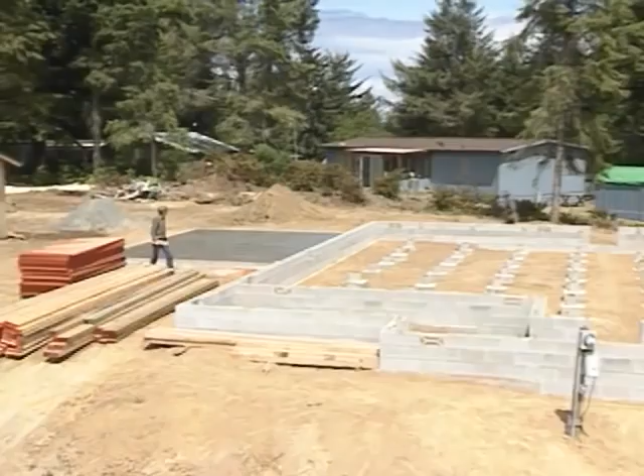You know, it's a good feeling. Come on a job, looks like this. It's clean, it's going to be a safe place to work. Any contractor that leaves a job looking like this has to be proud of their work.

So we can be pretty sure that this foundation for the crawl space is square and level. As carpenters, that's our responsibility to check that. Then we're going to put down our mud sill. If this gets done properly, the entire framing process is going to go a lot easier. So we'll begin by Joe and I checking this building for square.

You pull out 6 foot, I'll pull out 8 foot. We're using a standard 6, 8, and 10 check to make sure the block layers left us with a 90-degree corner. Now if they didn't, we'll have to adjust the sill in or out a bit to compensate. Looks great, Joe. It's right on 10 foot. Let's check the diagonal, see if we're square clear across the building.

This is your best check for the squareness of an entire building. What you're hoping for is that your diagonals are close to the same length. Right on the money. This building's square. Finally, we check the building for parallel. We want close to the same width on each end. 1/8 inch off. That's good.

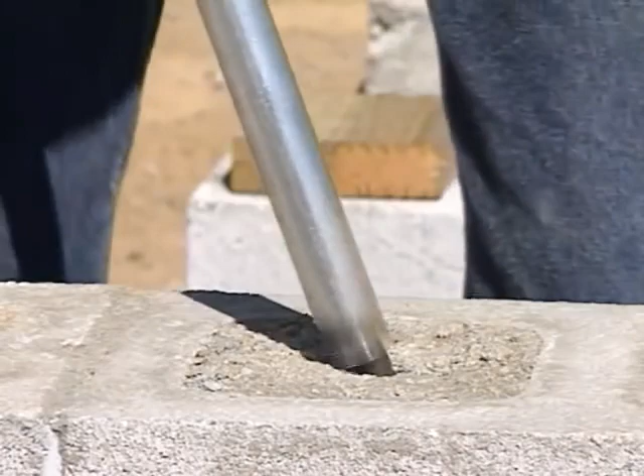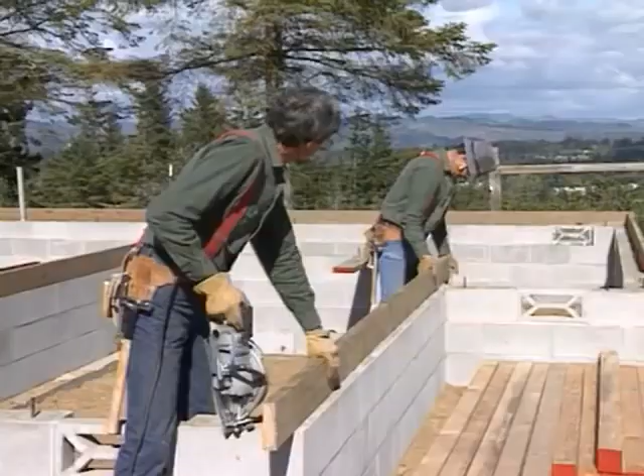Some of these foundation bolts are bent. It's no problem. Take a hunk of 3/4 pipe and straighten them up. Well, it's time to scatter all of our 2x6 sill around the perimeter of the building. It's a treated sill, so it resists dry rot and it really discourages termites. And once all the sills are scattered, we can cut them to length. That's it. Looking good? So, time to cut all our sills.

A good, efficient carpenter doesn't always have to use a measuring tape and a square to get the work done. Let's take a look how that goes. First of all, we sight down this concrete foundation to get our board marked for length. We mark it with a saw cut. We pull the board out a bit. The next step is important. How do we cut square without a square? Well, simple. Line the saw table up with the edge of the board and make the cut.

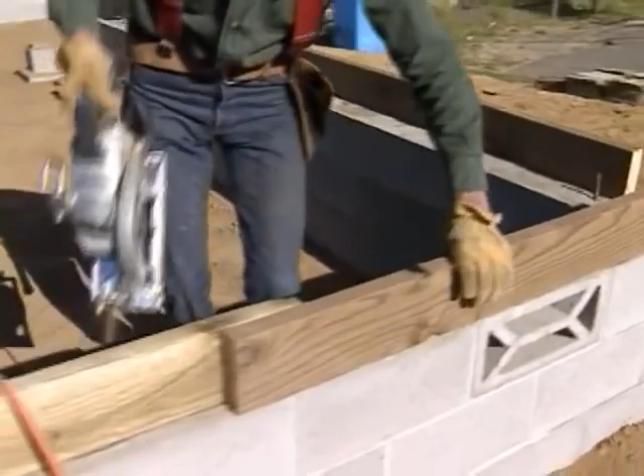Shove this piece of sill back out of the way and take a block of the same material and position it flush with the outside of the foundation. Then we can bring up this piece of sill and cut it to length again without using a measuring tape. Safety is part of being a good carpenter. Wear gloves when you're handling this treated wood. And wear safety glasses, earplugs, and keep that saw guard down.

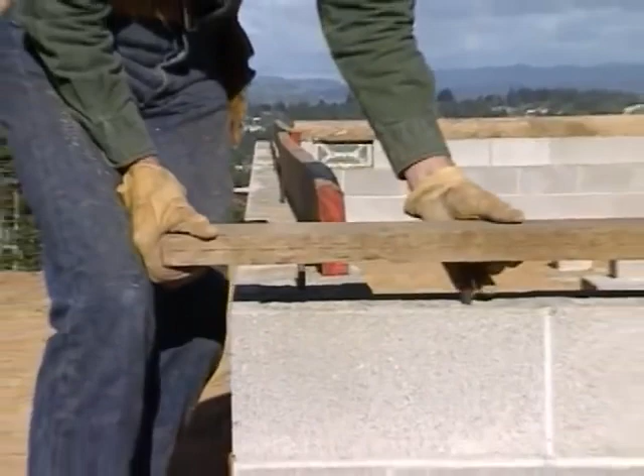The next thing we do is mark the bolt hole locations on all the sills. Just align the board flush with the blocks. Okay, looking good. I'll mark the first one here. And then we just tap down with our hammer directly over each bolt. That leaves a mark that we can use for drilling our holes. We use a heavy-duty drill motor and a good sharp auger bit to drill our holes. We drill at least an 1/8 inch larger than the diameter of our bolts.

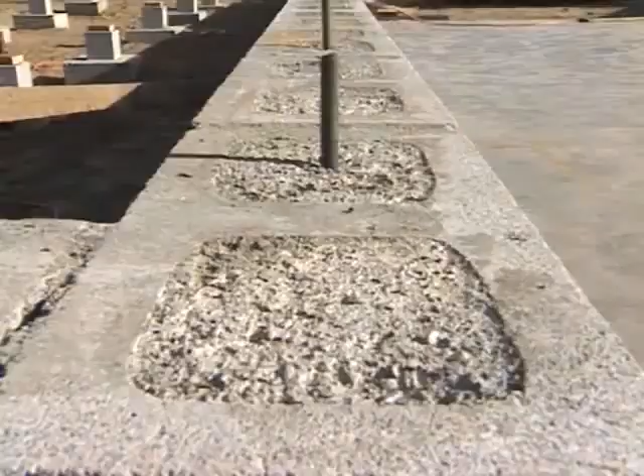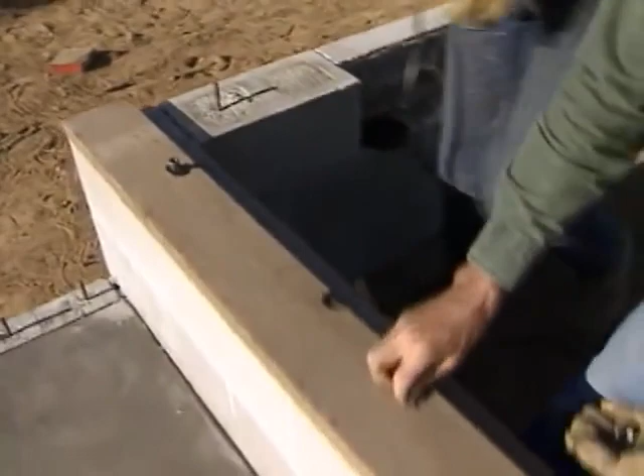To help keep out the cold, we put down a fiberglass sill sealer. You can also buy one that's made out of foam. Check your plans and the local code to see what's used in your area. Now the sills go down. Joe puts washers and nuts on the bolts, and I like to tighten them down with an impact wrench. That's a lot faster than a socket or crescent wrench.

Yesterday, Joe and I finished bolting down all these mud sills. And you remember that we checked our corners for square and our walls for parallel. Well, today we've been going around and making sure that our sills all the way around the building are level. And you know, it really is pretty incredible, but they're close to perfect, about an 1/8 inch variation.

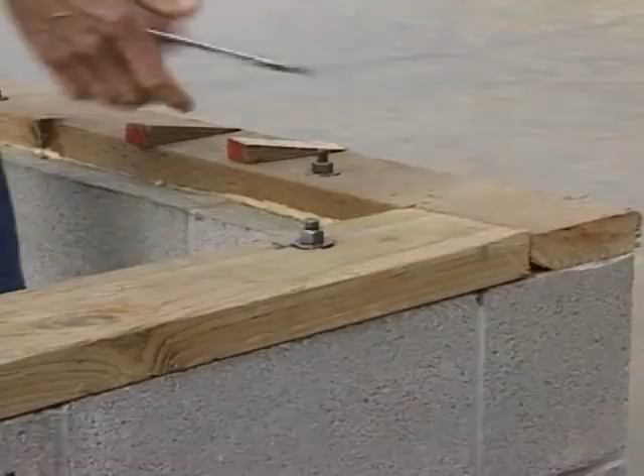But sometimes that's not true. You'll have to adjust these sills a bit. Simply loosen the bolt. Take a couple of treated shims, pick that sill up the desired amount. And this crack here gets filled with the dry pack. It's a dry concrete mixture.

Now take a look at these bolts. They're within 1 foot of the end. That's the code, not only here at the corner, but also down there at the joint. And then every 6 feet, you need another bolt. Now it's important not to take these bolts for granted. They're what keep your house where you want it to be, on the foundation.

The next thing I need to do is cut out for the girders that'll go in these pockets left here in the blockwork. I first outline the cut using a scrap of the girder material, and then I plunge cut very carefully with the saw. Plunge cuts can be made safely with both hands on the saw. One hand controls the switch, the other hand momentarily lifts the guard.

It always helps to have 2 people working. In this case, Joe's going around marking all the girder pockets, and then I work my way around cutting them out.

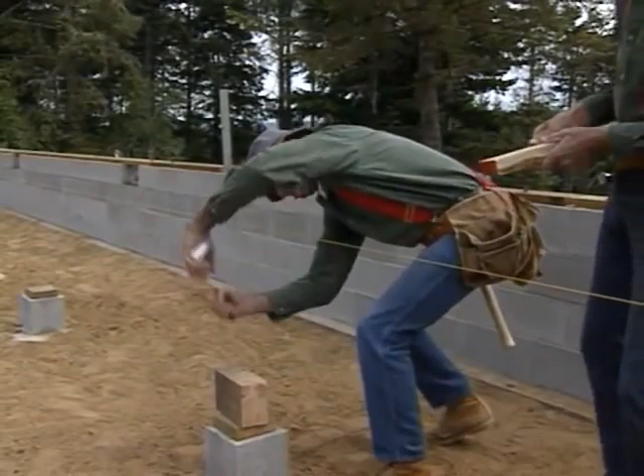Here we're building over a crawl space, so Joe's stretching a dry line tightly across the building from girder pocket to girder pocket. Then he uses a scrap of girder material on top of the pier block, and he measures the length of each post. He marks that length on the pier, and I write it down on a cutting list.

If you're supporting larger joists over a full basement, you'll find more information later on in the tape and, of course, in the book.

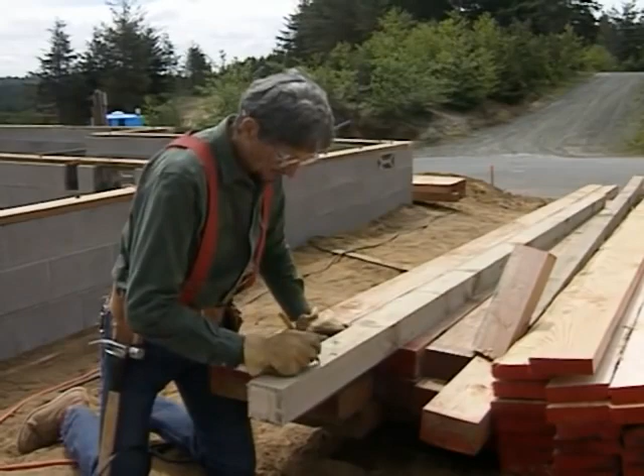With this cutting list, I can cut the treated 4x4s to length. One of the most efficient tools we have for cutting posts is a radial arm saw, but we don't have one on this job. So we'll be showing you several other tools. Here I mark the length on each post, and then I cross it off my cutting list.

Here's another place I don't have to use a square to make a square cut. Just line that front edge of the saw up with a 4x4 and make your cut.

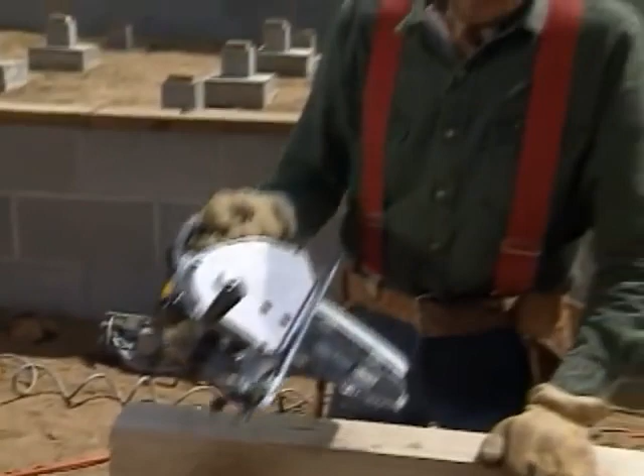There are other saws you can use to cut this 4x material. Here's one. It's a circular saw with a chainsaw attachment. It's got a guard here in the back, but it doesn't have one in the front. So when you're using this saw, set a square on the material, grab it with both hands, and use it in a safe manner.

And here's another saw we use to cut heavier stock. We call it a beam saw.

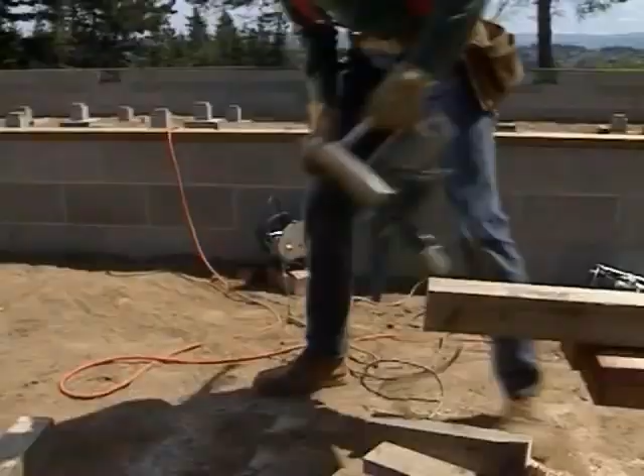And then, if you have a power outage, there's no electricity left in the world, and your electric generator won't work, grab the old handsaw and go for it. And 3 days later, you'll be through this 4x4.

Well, we've got all our posts scattered, and we're ready to nail them on top of our piers. Now this one here is in good shape. The post itself is cut square, and the pier is set in good and level. Now let me tell you, I've been on a lot of jobs where this just wasn't the case.

A lot of times these piers get poured out of level, and what happens is that makes the post out of plumb. Now, to compensate for that, you may have to cut this post out of square a little bit. So when you're finished, the post will set square on that pier and give good solid support to the girder up above.

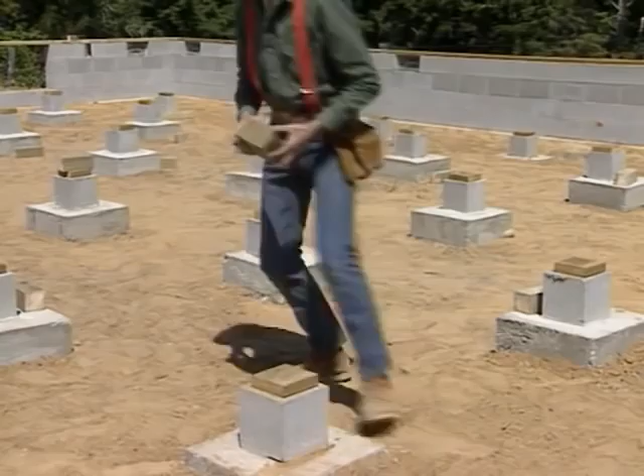Now that we've got all these posts cut, we have to toe nail them to the piers using 8 pennies, 2 in from each side. You could also use 16s instead. And we just center them on the blocks by eye. Again, these posts are treated, but check the plans and the code to see if they're required in your area.

The next thing we do is scatter and nail all the girders in place. Where the girders fit into their pockets, we cut a block of treated wood to bring them up flush with the sill, and then we nail them off.

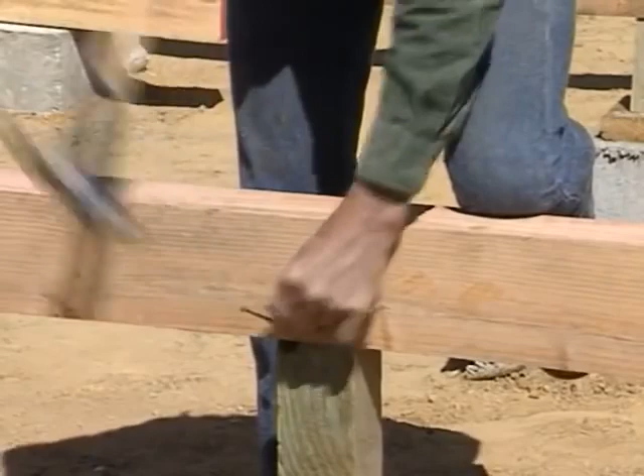Notice that here in the crawl space, these girders are 6 feet on center. Over a full basement, we support larger joists by a girder or a wall in the middle. We nail the girders securely to the post with 16 penny nails. Now, in some areas, the code may require a plywood gusset or even a metal connector at this joint.

Now, I want to show you something that happens out on the job. These piers, they're poured and lined. But let's face it, sometimes they're not done as well. So what happens is, when this post is put in the middle of the pier, you don't have full bearing under this girder. It looks something like this.

So what we do is we nail both ends, and then later on we can put in these posts and line them up like they ought to be. So it has full bearing underneath this girder. Then we can nail it down.

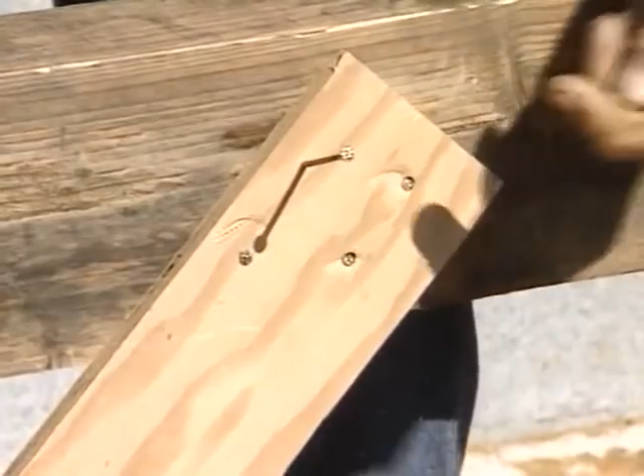Another thing is that when these pier posts are 3 foot or longer, you have to nail a brace on them. That's what the code wants. Well, it's obvious that this post is only about, what, 20 inches long? But this is the way the brace nails on.

Now, beams aren't always perfect. Take a look at this one. It's twisted. We want it to set flat down on that girder post. Let's show you how we do that. When a girder's as twisted as this one is, I just make a cut mid-span right over a post. That way the twist is taken up by 2 pieces rather than 1. That's the way we want it.

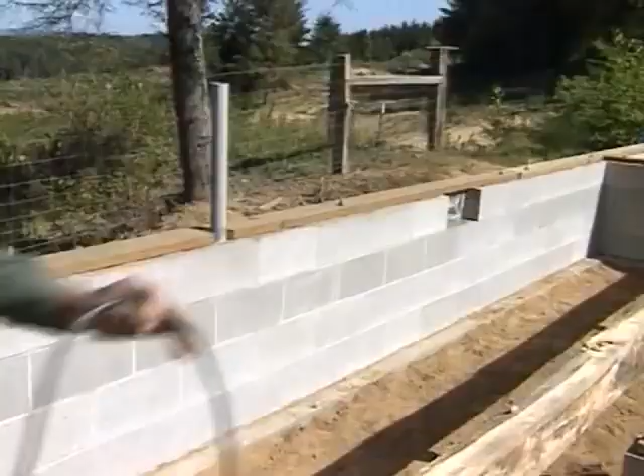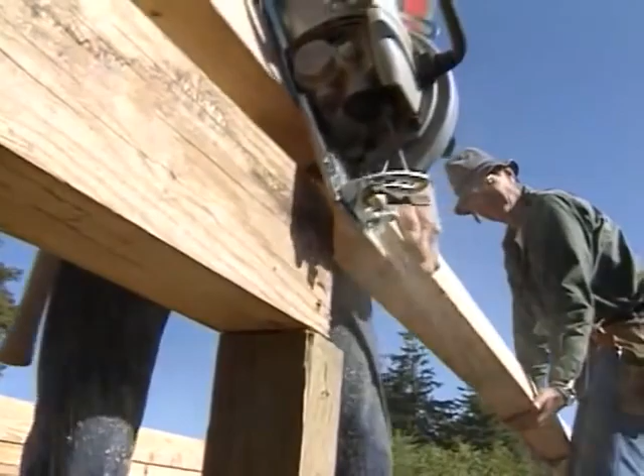Well, we just have a few more middle girders to place. And to do that, we have to cut off some of the ends of the girders we've run in. We wait to cut them to length until after they're all nailed down, so we don't have to use a tape measure. Also, when we nailed them down, we made sure our nails were off to one side so the blade wouldn't hit a nail. You'll note that we're cutting to fit this building. We seldom have to use a tape measure.

Here at the joints, we nail each girder to the post with 2 16s, and then we join the splice with 3 more. Now with the girders nailed in place, Joe's taken a moment to sight across the top and make sure everything's flush.

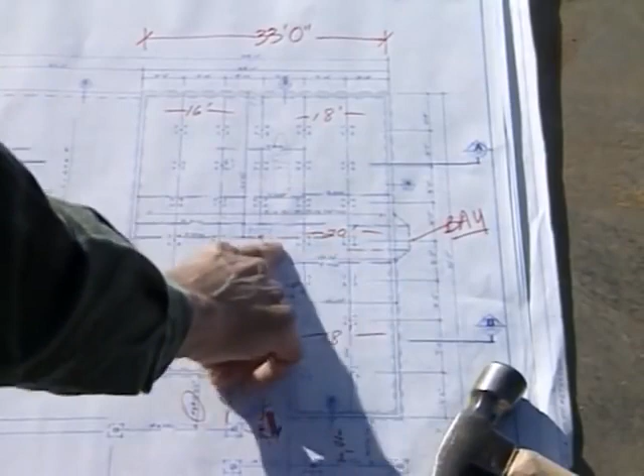So I guess all these joists for this building are 2x6, huh? Right. Except in this front end where we have 4x4s for a deck that's going to be built out here. That'll drop it down 2 inches so we won't have water problems. And then I guess we only take 2 lengths, 16-footers and then 18-footers on over, except here in this area where we've got a little bay window. The cantilever's out 2 foot right there. It'll take 20-footers here. So I guess we can get started.

And right along this side over here, we'll run on a rim joist. Right, just use 16s over there for the rim. 16-footers here we'll use for rim joists. We'll get that nailed on, laid out, and pack joists. Let's do it. Well, moving lumber is one thing a carpenter does a lot of. Make it as easy on yourself as possible. Drop the lumber close to the building and learn to carry it on your shoulder.

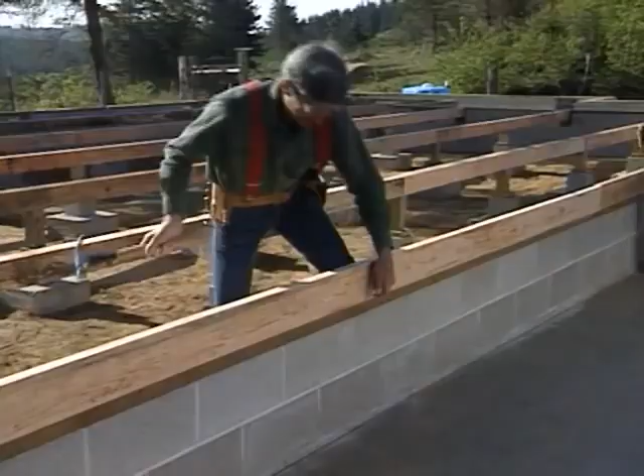This is a rim joist. It nails flush with the sill. I nail it tight at one end and then toenail it every 16 inches with 16 penny nails. It's important to tie that rim joist to the sill. When you're framing up higher, you may need to work off the plate like I'm doing here. Now keep your mind on what you're doing and work carefully.

The next thing is to lay out the rim every 16 inches on center to mark the joist locations. I use a crayon, we call it a keel, to make a clear mark at 16, 32, 48, and so on. The marks on the side of the line, these show where the joists will nail.

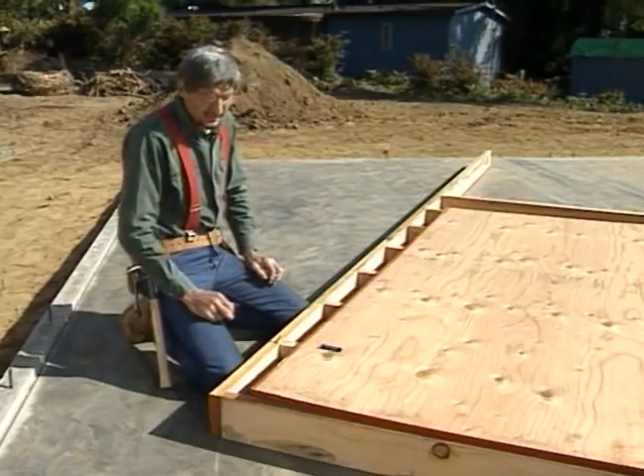Here on the garage slab, we've set up a model floor in order to illustrate a point. This rim joist is laid out just like the one we nailed on. We hooked our tape on the outside, came over 16 inches, made a mark for our first joist, then 32 inches, 48 inches, and so on down the line. Now, what this means is that when we sheet with our plywood sheeting, this first sheet is going to break half on this first joist. But that's just the way it does down there on our last joist. And it has to break like that because we're going to go on with another sheet.

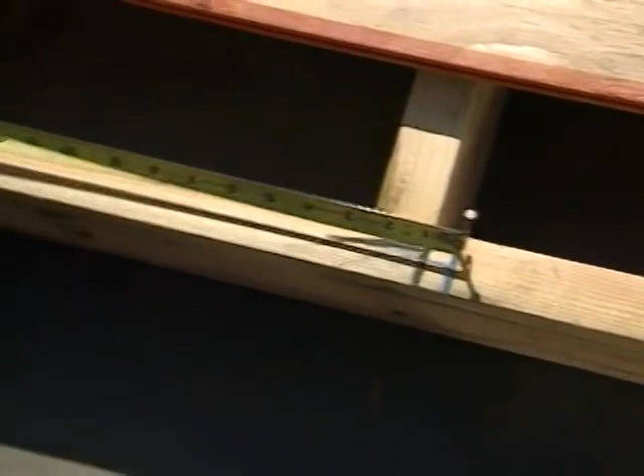Now, traditionally, it's been done a little different. They'd hook their tape on the outside, and they'd come over 15 1/4 inches, make their mark. Then, they'd drive an 8-penny nail in at that point, hook their tape on it, and go 16 inches, 32 inches, 48 inches on down the line. What that means is that this first sheet of plywood will have full bearing on this outside joist. We don't do it that way. It means an extra step, and structurally, it just doesn't make any difference.

With the rim nailed off, time to scatter the joists. Start on one side and lay down a joist every 16 inches. Once you get a few joists down, then you have a safe walkway to carry the rest.

Now we've got the joists scattered on one side, but they're long, so we mark them quickly with a framing square, cutting off the ends for blocks. These go between the joists. It's easier to work here in the middle of the building and cut these joists to length before we scatter all the rest of the joists on the other side.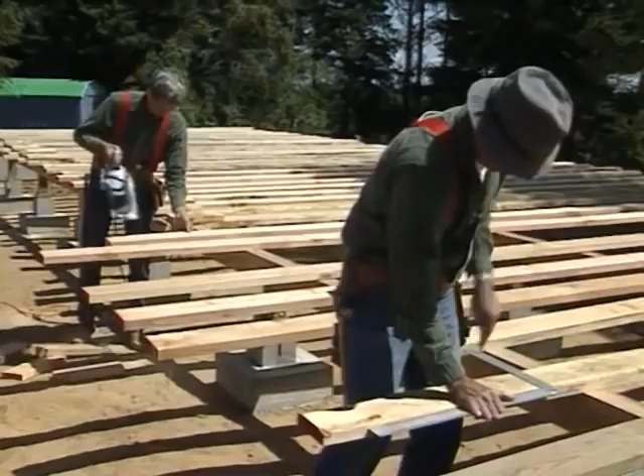Once we get the joists cut to length on the far side, then we can scatter those that go here on this side. I push them up tight against the rim, cut off the excess by eye. Just make sure that your joists lap at least 4 inches.

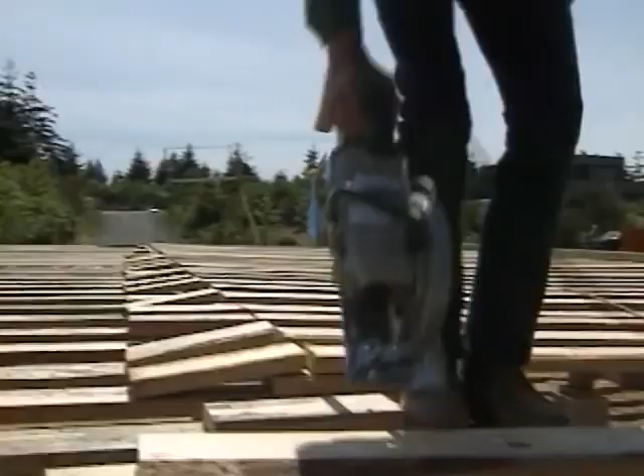Okay, it's time to nail them in place. We roll them up on edge. Then we plumb them by eye on their layout marks. And then we nail through the rim right into the joists with 2 16-penny nails. And that's the code requirement. So we're rolling joists. That is, we're setting them up on edge and nailing them in place.

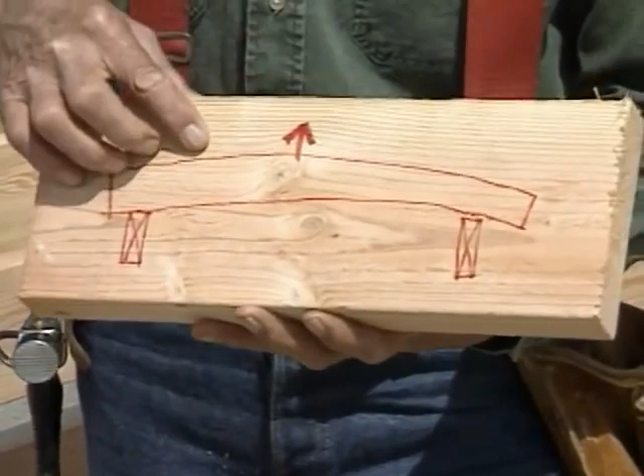Now, frequently, joists will have a bow in them. A crown is a bow. Common practice is to put that bow up. Then the weight of the building has a tendency to push it down straight.

But in a building like we have here, we have girders every 6 feet. So crowning joists is not all that important. They're going to be straight once they're rolled. But if you do need to crown them, just sight down it and you can see the bow.

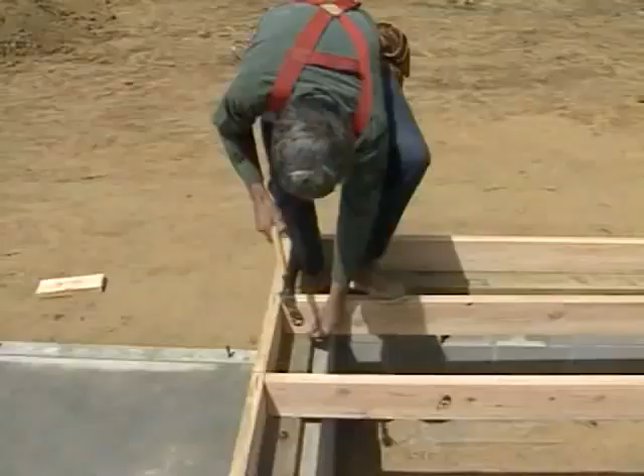As you nail, try and set up a rhythm. You can set a 16 with 1 lick or with 5, but it really doesn't matter. What matters is that you establish a pace that works for you, going easily from one nail right on to the next. Joists have to be secured not only to the rim, but also to the sill. 1 16-penny toenail on each side.

Here on the other side, we're pulling our joist back so we can nail the rim on. We waited to nail this rim to show you how we do it when we're working on a second floor. Up high, it's safer to first scatter your joists and then use them as a walkway. Because we're at ground level, we can nail this one off just like the other one.

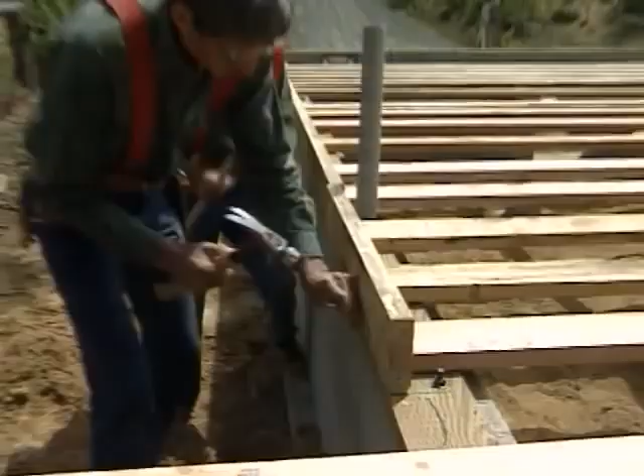Our building is 48 feet long, and we need several pieces of rim, so we just butt the pieces together. Now it's just a matter of nailing the rim to the sill all the way around the building.

Well, now I'm laying out the opposite rim. It gets laid out on 16-inch centers the same as the other side, but there is one difference. The joists here fall to the other side of the layout line. There's more on this later.

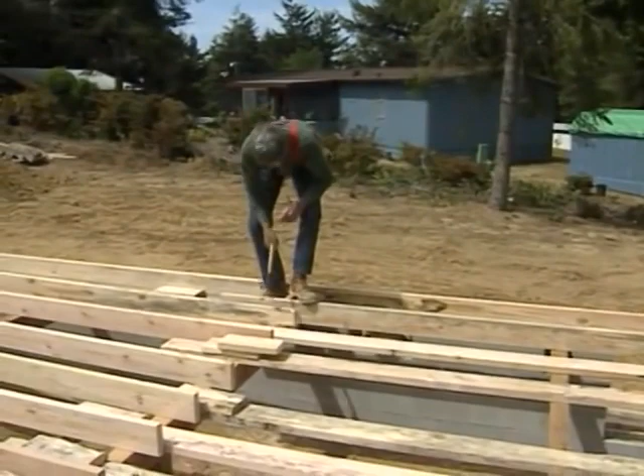Joe and I work together as a team, rolling, nailing off these joists. Joe nails out at the rim, and I'm nailing here at the center. The joists lap here over a girder. I nail the laps together, and then I put a block in between each pair, holding the block flush to one edge of the girder.

It's important that these blocks are cut accurately because we don't lay out the center. We depend on the length of the blocks to keep our spacing just right. Hold on a second, Joe. I want to check our layout, seeing that we're running 16-inch on centers. Yeah, it looks real good. Our blocks are the right length.

Here in the middle, I nail in 2 16s through the joist into the block. Then lap the joists. The code calls for 2 more 16-penny nails here, plus a toenail down into the girder. Then another block. Lots of nails here.

Away, nail. Here we're straightening the joist by eye before nailing them to the intermediate girders. Okay, away from you, about 1.5 feet. It's got the crookedest joist in the city. Back to you now. Back to you. Nail that. All right, looking good. Way here. Nail that. Okay.

Joe and I have been up on that main floor working, but now I wanted to come down on this model floor and show you a little bit more about layout and about how we nailed it all together. You'll notice that on each rim joist, we have a layout at 16 inches on center.

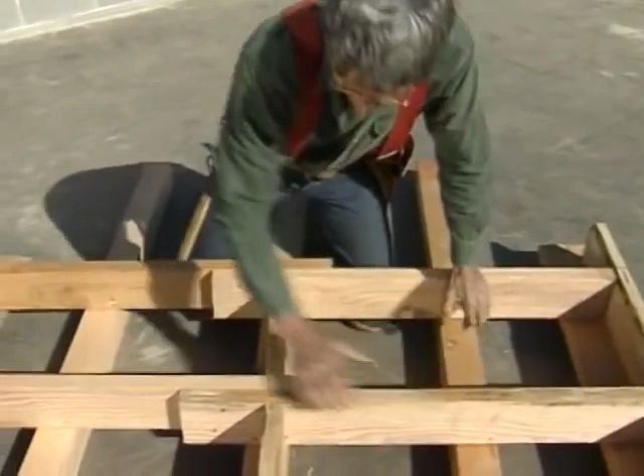The only difference is, here, the joist goes on this side. Over here, it's nailed to the opposite side of the layout. This allows these two joists to lap here in the center. Then, with a 13-inch block nailed in, we maintain our 16 inches on center.

The block gets nailed in with 2 nails on this end and 2 nails in through that joist into the end of the block. Here at the lap, we nail this lap together with 2 16-penny nails. Then down into the girder, you get a toenail down on this side and another 16-penny toenail down through this side. And that's what happens at every girder. We get a toenail here and a toenail here, and at every sill, the same. A floor nailed together like this one meets the building code requirements and gives you a good solid base on which to build your home.

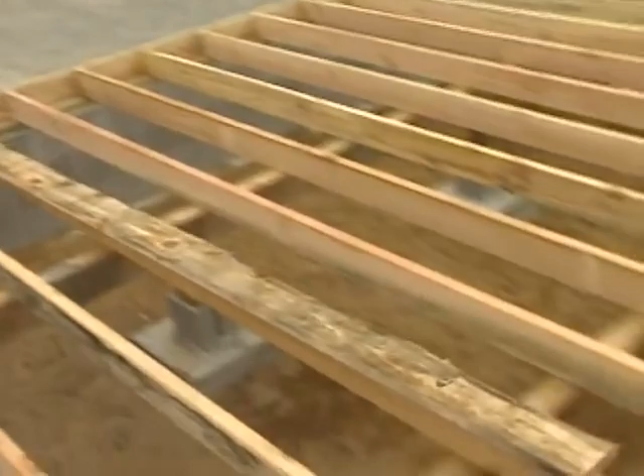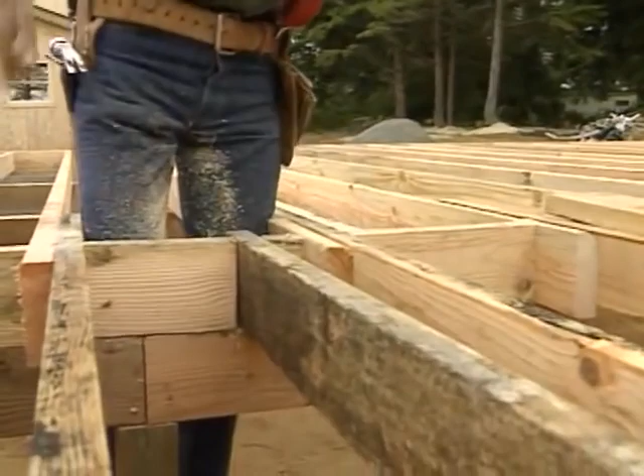This is an access hole for the crawl space, and I have to double up the rim here to support any load from above.

Here we're working on our bay window, and that's why these joists cantilever out over the edge of the building. Because of that, we stopped our rim joist and ran in 14.5-inch blocks to maintain these joists at 16 inches on center. This bay window comes out from the building line 24 inches. So we measure out 22.5 inches, make a mark here, and another one down at the last joist. Then we'll snap a chalk line and cut it and nail on our rim joist, and we'll have a full 24 inches.

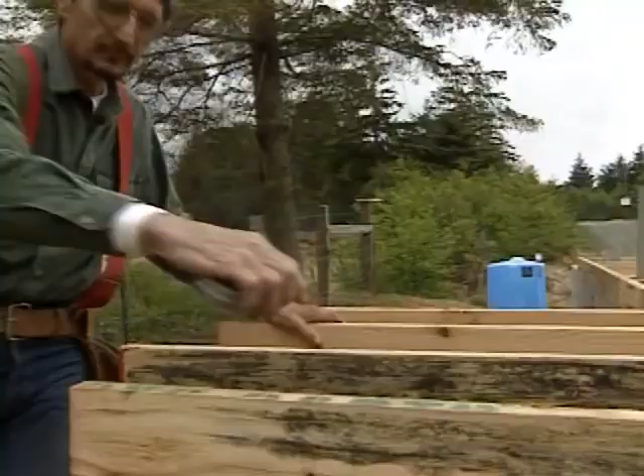You're right, some of these boards are ugly, but the discoloration is only on the surface and it doesn't affect the strength of the wood. This is Douglas fir framing lumber, number 2 or better. It's strong, and as a framing lumber, it's hard to beat.

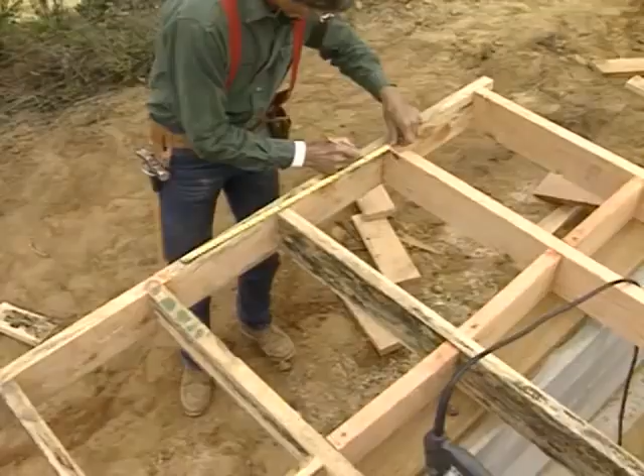You can see that I've let this rim run long. I'll cut it later. Now the front of the bay is 4 feet wide. I found the center, and now I'm marking the edges of the bay 24 inches from that center line. Next, I snap a line at 45 degrees to mark the sides of the bay. I have to lay the saw over at 45 degrees to cut the joists. The rims then nail on with a 45-degree cut on each end. A bay like this really makes a simple building more appealing, and it only takes a little more effort.

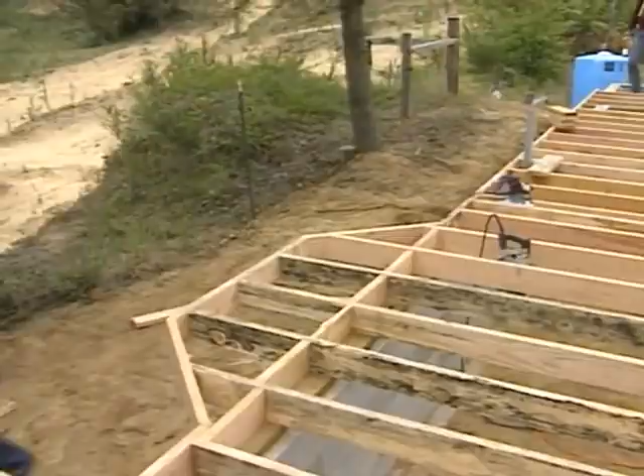I know it's hard to see, but I'm working right here in the middle of a bathroom. Now there's going to be some plumbing coming up here through the floor to serve a toilet. Because of that, we had to cut out a section of this joist. We supported that joist by a header, and we used 2 different kinds of hangers, a U-type here and an R-type here. Framers prefer this R-type hanger because it only takes 4 nails, whereas the U-type hanger takes 5 nails per side.

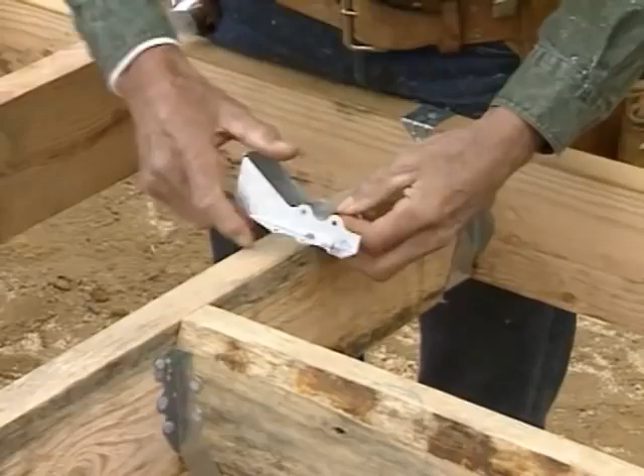But what about if we need a larger hole in these floor joists, like for a stairwell, where we have to cut not only this joist, but maybe this one and several more? Well, if that happens, then you have to double up these side joists. Not only the side joists, but also the header joists. There's more information about this in the book.

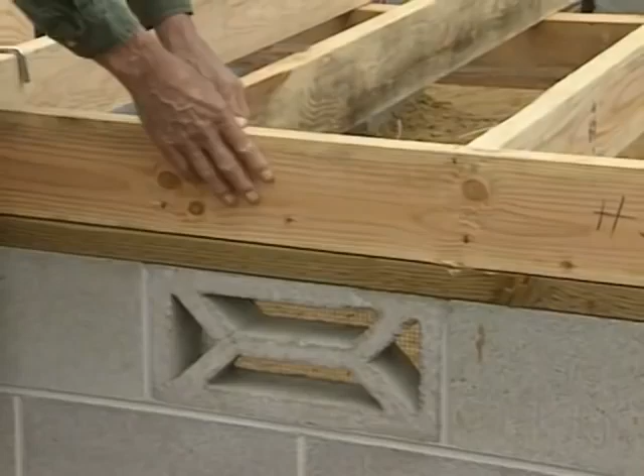The floor frame's almost finished. We just had to add some more blocks to support the heating vents. Well, the heating contractor is finishing up their ductwork, and we're almost ready to sheet this floor. Let's take a look just for a minute at the underfloor ventilation. Here it's in the blockwork, but frequently we'll cut it in the rim joist. This is easy enough to do. We just cut out a section of rim between two joists.

Then we can nail that same piece flush with the top to support the sheeting. Then a screen vent gets nailed in the opening. Crawl spaces need vents. A full basement may not.

We've got all our regular blocks cut. Now we're cutting specials. No need to use a measuring tape. Just shove a block in the hole, make the cut. A special is any block that's not a normal length, like here at the end of the building.

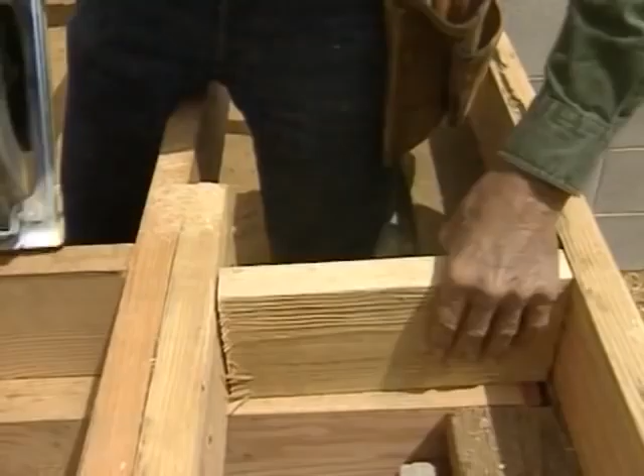On this section of rim joist, we had to cut out for 4x4s that will be used as joists here on the porch. After these are sheeted with 2x decking, the porch will still be lower than the house deck, preventing any water from running inside. We mark for the cutouts with a piece of scrap, and we make the cuts.

Well, now we're ready to run our first row of 3/4 tongue and groove plywood, sheet this building. I came off the corner here 4 feet and a half inch. That leaves room enough for our 4-foot sheet of plywood, plus a 1/2 inch for the tongue that's going to lay to the outside edge. Now it's really important to get a straight line all the way down through there for our first row.

To do that, we're going to use a string. Carpenters call it a dry line. We're going to pull that all the way down through there. I'll mark a couple times in the middle, and then I'll snap a chalk line. It isn't necessary to use a dry line on a short building. I'm using it here to show you how we do it if the building is longer than your chalk line. Just run out the dry line, mark the middle of the run, and then you can snap twice.

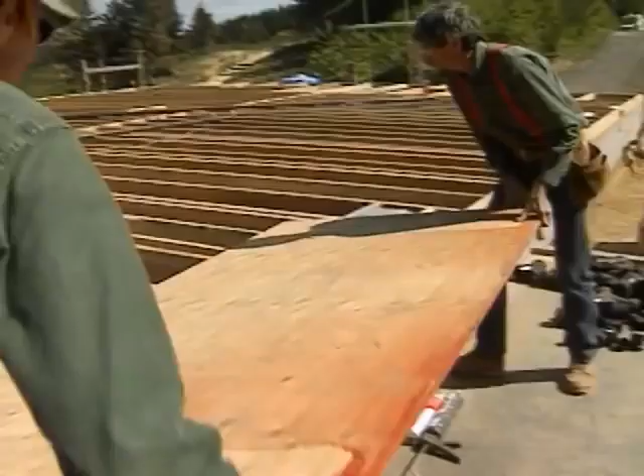This is 3/4 tongue and groove sheeting. It's strong, but your code may only call for 5/8 or even 1/2 inch. Here Joe and I are scattering an entire row out in front of us. We use construction adhesive for a couple of reasons. It bonds the plywood to the joist, and it keeps the floor from squeaking. We only run on a sheet's worth of this stuff at a time. This way it won't dry out. And on most joists, we can run a bead right down the middle. But where the sheet of plywood ends, I need to run it right on the edge.

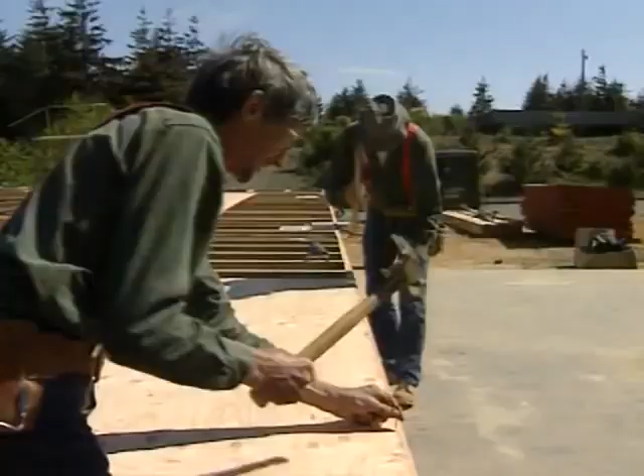We flop a sheet over and nail it in place. We follow our building code and drive 8-penny sinkers every 4 inches along the perimeter of the building, every 12 inches in the field, and every 6 inches at the joints. Now your code may call for ring shanks or even screw nails.

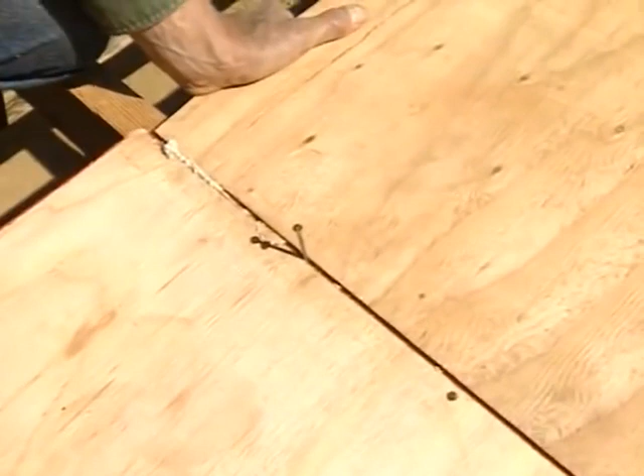Plywood will expand in wet weather, so we leave an 1/8 inch gap in between those joints. We just stick in an 8-penny nail, then we're ready to nail it off. On longer runs, leaving an 1/8 inch gap between the sheets means the ends won't always break on a joist. Now when that happens, just trim a sheet or scab on a 2x to give the end full support.

Oops. 19 1/4, 24 1/4. 19 and a quarter, 24 and a quarter. We've got the edge of this sheet of plywood right on the chalk line. Joe measures for the heating duct. You're right on the line? Yes. 29 and a quarter, 40. And 40. And then I mark it out. Got it. And then, with careful plunge cuts, I cut out by eye between the marks.

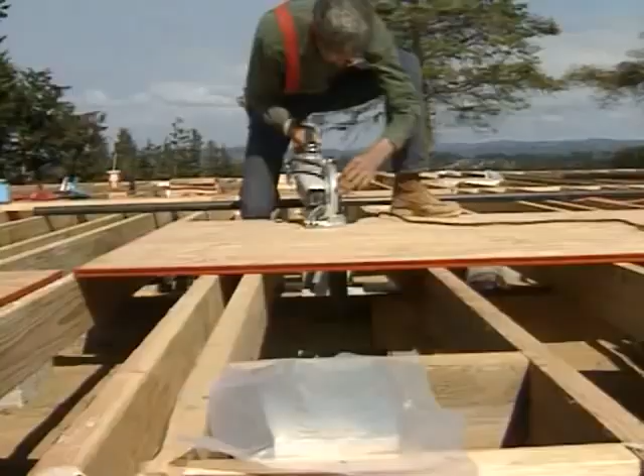That's pretty bloody incredible. I'm sorry I ever questioned your ability to measure.

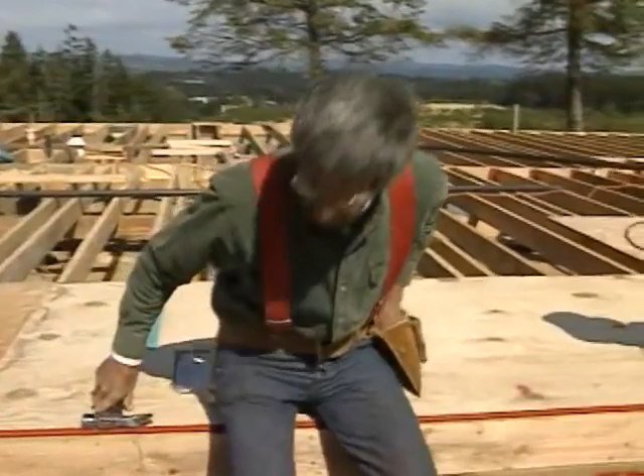We're hand nailing on this floor for a while. Normally, we nail these floors off with a nail gun. But a lot of people don't have a nail gun, so there's no reason that you can't learn to be a fast nailer. Take a bunch of 8-penny nails out of your pocket. They come out looking like that. But you grab all the nail heads that are face down, pull them out, put them up. Then they'll look like that. Now you can finger those nails out one at a time. This is the way it goes then.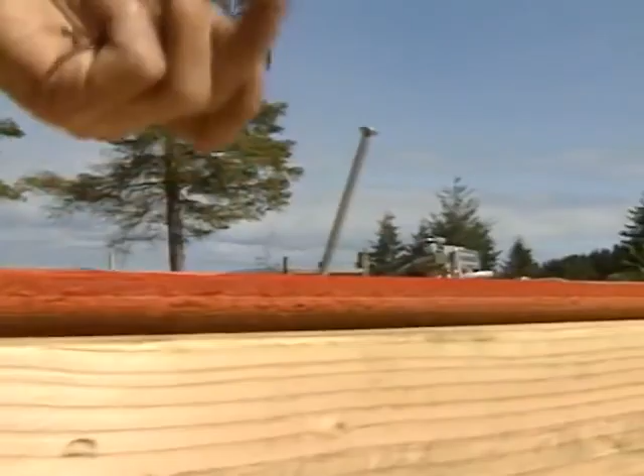I'm using a drywall square to mark a half sheet, which we position and nail down at the end of the building. You always want to stagger your plywood seams from course to course. So we start every other row with a half sheet. Tongue and groove plywood needs some persuasion, and it's helpful to have two people. Right side. Hit it, tap it. Joe uses a 2x beater block along the groove side of the plywood.

And the 1/8-inch gap between the sheets can be maintained by using a nail or by eye. Don't beat on that sucker too hard. Watch your window. Okay. You got it, Joe. Looking good. Let's nail her off.

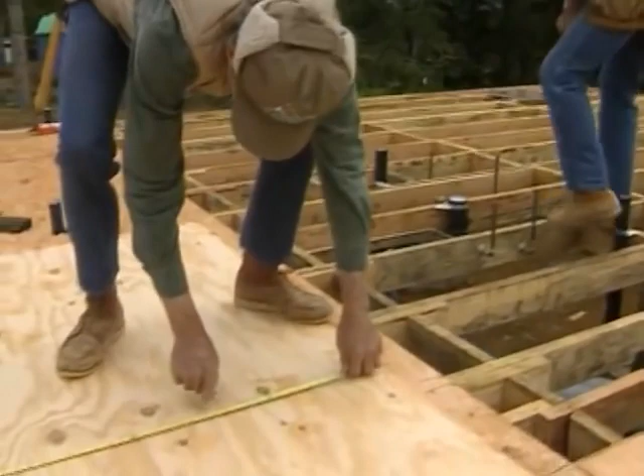We also have to cut out for plumbing pipes. There we go. 45 and a quarter center. 45 and a quarter. Both of them. Both pipes. That's the copper pipes. Yeah. There we go. 31 and a half. 39 and 3/4. 31 and a half, 39 and 3/4. I'm just marking the centers of the pipe, then I cut around them by eye.

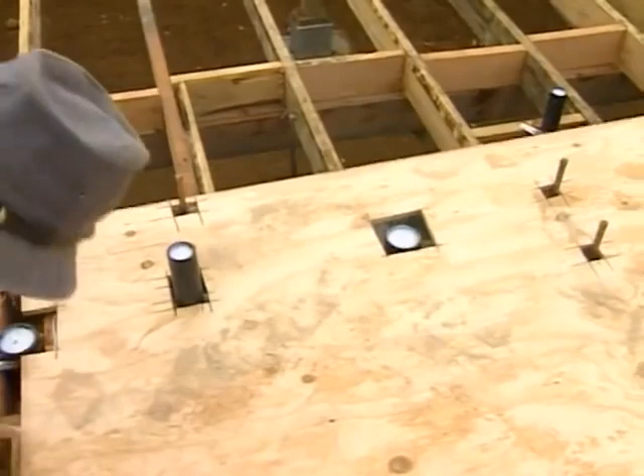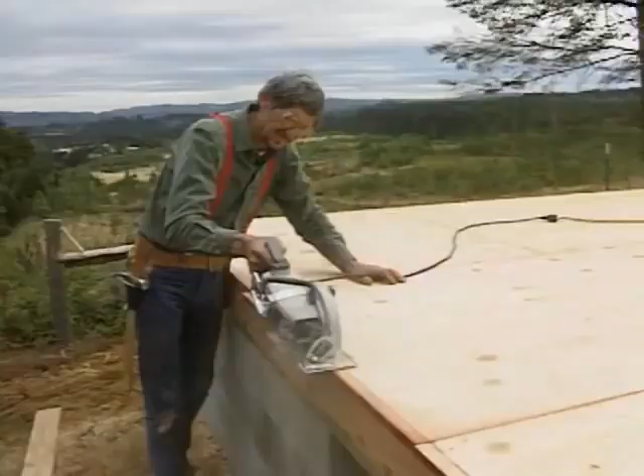That's got it. That leaves a 1/8-inch gap. Well, it's nice to have help when you're nailing off a floor by hand. The small hammer works, as well as this pneumatic nailer, which speeds up the process. The plywood ends that overhang the rim are marked with the chalk line. And then they're cut all at one time.

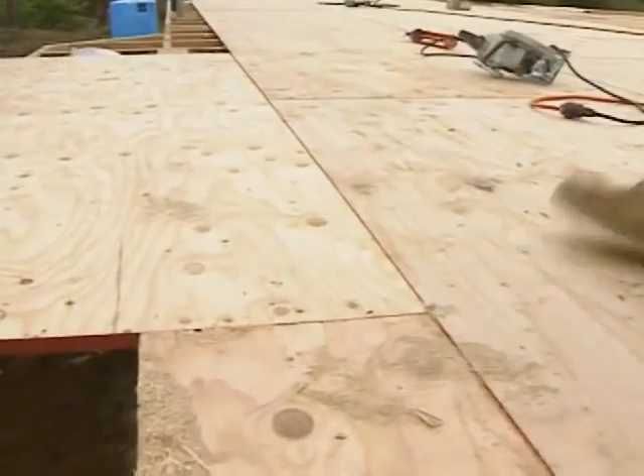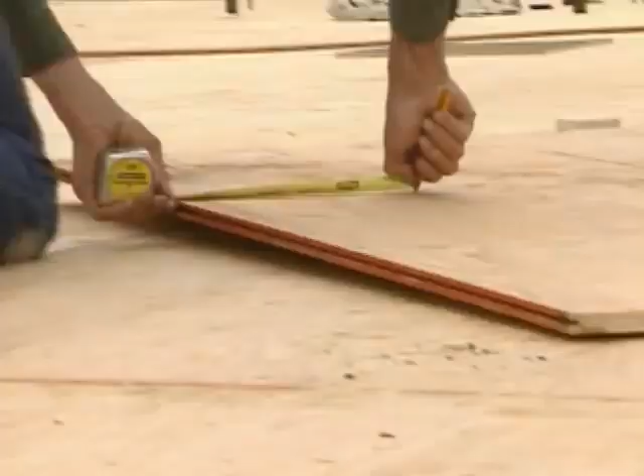Just a couple more pieces of sheeting. This is a good place to use up all the scraps. Well, this cut here at the end of the building finishes the main deck. Only thing we have left to do is the porch.

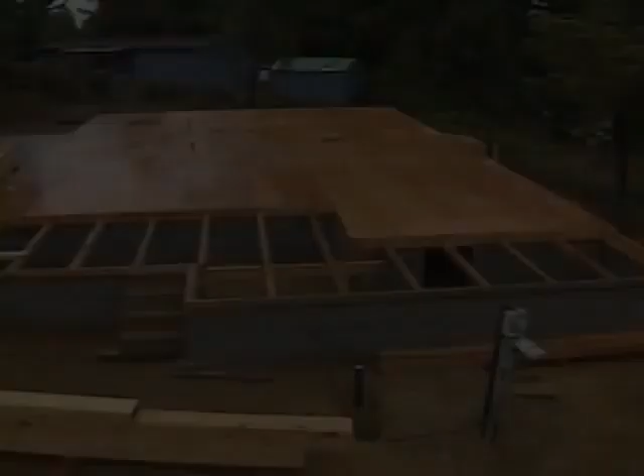Well, at least it dried up enough that we can pack these cedar boards that Joe had cut at a local sawmill. Again, we lay the first board to a line so it'll be absolutely straight. Snap, Larry. You ready? I'm ready. All right, lay it on the line. You got to give me a little bit. Okay, I got about an inch here. Looks good. Okay.

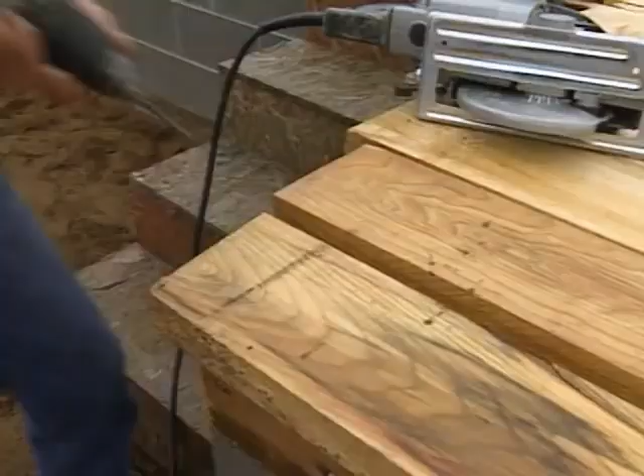Then, because we're screwing these down, we drill pilot holes through the decking. Here I'm using a drywall square as a guide to keep the holes in a good straight line. Then I screw the boards down with a 3-inch non-corrosive screw. And here at the end, Joe snaps and cuts.

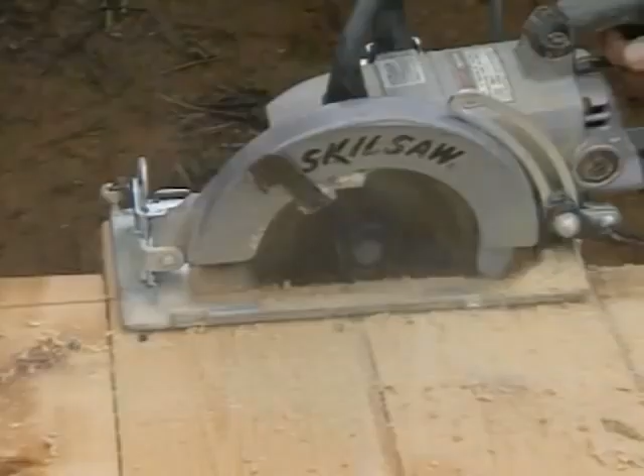Wow, looks like we're finally going to get a break in the clouds and get a little sunshine on our backs. But in spite of all the rain, look, we got the floor all down. The deck out here we'll finish up after the exterior siding is put on. I want you now to take a look at this floor. It's a pretty typical floor. It may be a little bit different from the one that you're going to build, but let me tell you, the basics, they're the same.

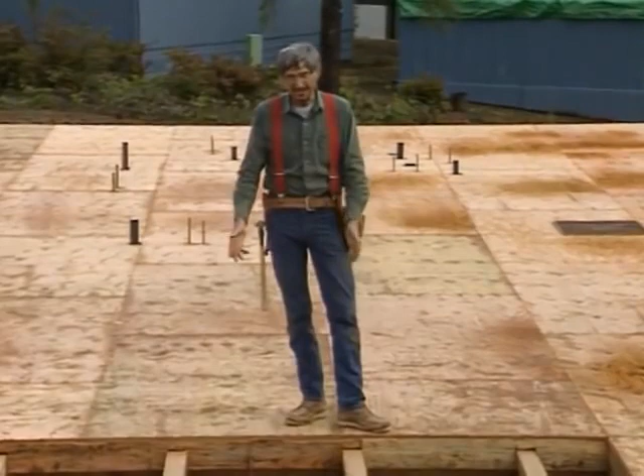There isn't anything complicated about what we've been doing out here. It's just a series of simple steps that if you follow them, you can build the same kind of solid floor that we have here. Solid so that when you roll your grand piano out in the middle of this floor, it won't fall through. Anyway, we're ready now to get our lines down, put our plates down, and start framing walls. So let's do it.

Well, as you can see, we've jumped way ahead in this building process. The floors are all down, got the walls built. Here we are, joisting on the second floor. But this is a one-story building. We put these joists up here just for demonstration purposes. We wanted to stop for a little bit and show you how to joist with heavier joists. In this case, 2x12s. Here we have a built-up beam, and we're putting on hangers.

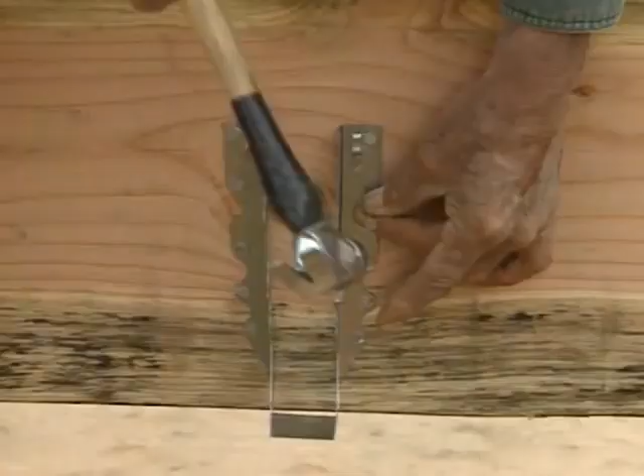Now, it won't be long before we'll take all of these joists out of here and we'll get on with the building process, putting on ceiling joists, nailing in rafters. Out there on the outside edge, those joists are going to be cut to length and we'll nail on a rim joist just like we did down on the first floor. Here you'll note, in this section, we left a large opening so stairs could come from that first floor up here to the second floor. These hangers can carry a lot of weight. Place them right on the layout and drive a hanger nail in every hole.

Now, whether over a basement or second floor, larger joists are frequently used because they can span a longer distance and carry a heavier load without any support. One way to cut the joists to length is to snap a line on their top edge, 1.5 inches back from the building line. Then just square down and make the cuts.